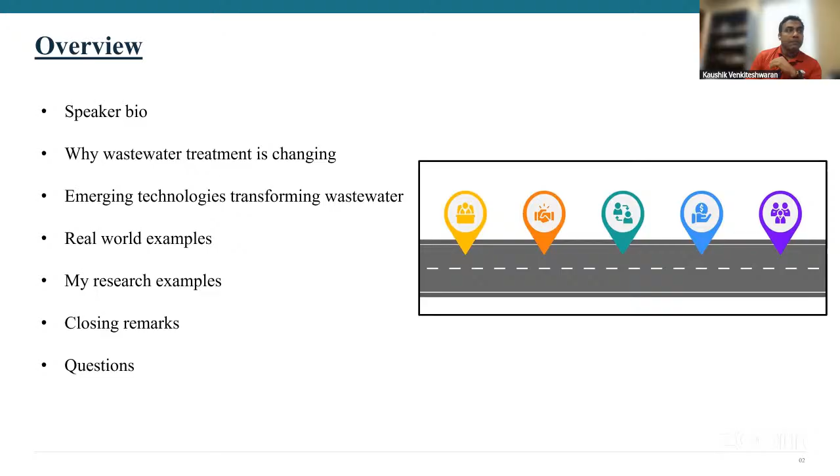So a little bit about me. As mentioned, I did my PhD at Marquette in civil and environmental engineering. I did my master's at Clarkson in civil and environmental engineering. But one of the points I try to bring up now, and also to my students, is that my undergraduate was not in civil and environmental engineering. It was in biochemistry. So that's one of the interesting things about the field nowadays, how interdisciplinary it is.

We require talent from different fields. And that was one of my first examples when I saw how environmental engineering is. Environmental engineering on its own is a true interdisciplinary field. We cannot do anything without other engineers.

There was a time when our job was just to move water. You had clean water here, you need to bring it here. That was our job. We were called water resource engineers at that time. But then eventually the water over here is not clean, so someone has to clean that water.

Now, how do you clean water? Practically, you use a filter or you use a chemical. Well, who makes that filter? Well, that's a material engineer. Who makes the chemicals, or how it's used? It's a chemical engineer or the chemists. Sometimes we use microbiology, microbes to clean water.

We need those. So I started noticing that my field will not exist without all this interdisciplinary field. And that's what I fell in love with, knowing that I have to learn more than what I know all the time for the challenges.

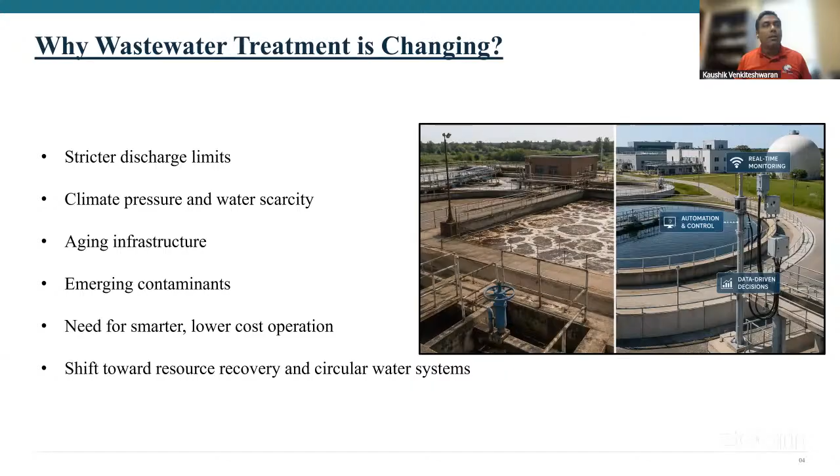All right, so with those drivers, there are certain emerging technologies in the landscape. There are maybe 10 to 12 that I came across, but I've kept the main ones that I experience when I go to conferences, etc. One of the main ones getting popular in the wastewater side, happening for a while but now slowly getting into application, is AI and smart automation. I'll go over a lot of these in more detail as we go along.

So you have AI and smart automation, which is basically what it sounds like — automating all the processes. Digital twin, which is basically a virtual modeling system that helps people visualize and predict how the systems have to be modified, etc. Advanced membrane systems — I know there are engineers in the audience.

I'm just not sure how many are environmental. So I'll go over a few details about the membrane systems. If you know already, I apologize. But membrane systems are now getting very, very popular. There was a time, it's been there for 2 decades, but it was very expensive.

RO systems are now in most houses in the US. It's slowly getting to a point that it can be affordable. Now, that same principle applies with wastewater treatment, etc., even water treatment. Now, those membranes are reasonably cheaper.

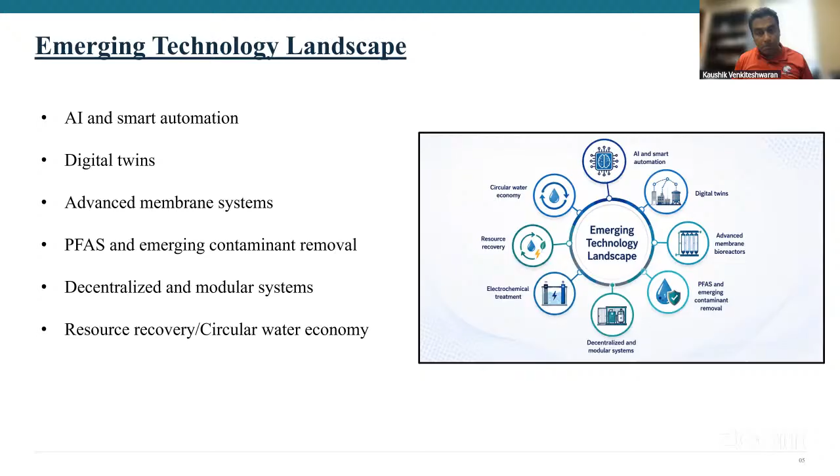As I said, we'll go over PFAS and emerging contaminants, decentralized systems. So that's a very important topic. It's also one of my research topics. We'll go over that. And finally, resource recovery, the push for resource recovery. So I'll go over some of this emerging technology landscape, and hopefully after this talk, we can have more discussion about these.

All right, AI and smart automation. So if you've ever been to a wastewater treatment plant or any kind of that system, it does not look any different from a refinery. You'll see a lot of pipes, tanks, etc., things moving. And the scale is huge. Even in Mobile, Alabama, which has a population, at least on paper, of less than 500,000 people, it has, I think, a capacity of 40 million, 50 million gallons per day. So that's a lot of water that has to be moved, maintained, etc.

And so if you go to a reasonable treatment plant, you'll see a lot of sensors. You'll see gauges, sensors, meters, pumps, valves, which are all operated automatically. Now, there was a time when there was manual operation, but the scale is so large, you only have 5, 6 people, it's almost impossible. So now you have what's known as a digital control. So everyone sits in an office, they have a big screen where they can push and control everything digitally.

Now, but that still requires a human to be there, right? So the human has to read the data from the sensors and then has to plug in and do some actions. Now, when you scale this even more and more, this is where AI and automation is needed. If you do a simple search on Science Direct for AI and wastewater, AI and anaerobic, you'll see thousands of papers of people right now modeling previous data. So they are taking data that has been collected from wastewater treatment plants and plugging it into new AI models. Why?

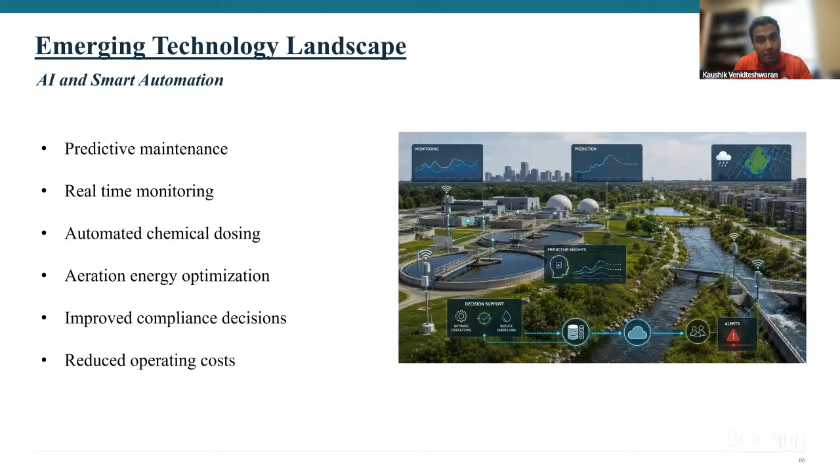Digital twin is, again, not obviously AI; people try to combine it with AI, but generally it's just a visual simulation technology, right? So you can actually basically create an entire digital wastewater treatment plant and then play with it. So this system is slowly coming in wastewater systems. I've again seen some companies, the same ones, Xylem, Jacobs, etc., who are doing it, but I've not seen it implemented fully. We are seeing AI and digitization, but we are not seeing the full virtual systems. But on the research side, I see a lot.

If you again do a ScienceDirect search, you'll see a lot of researchers, at least in universities, are trying to do that by partnering with local wastewater treatment plants. Because for them, it also is a research opportunity because you get so much data and you get predictions and models that you can use later on as well.

So this actually is the main thing right now that I'm noticing companies are pushing for and looking for talent in terms of integrating sensors, getting the data, and then modeling an entire treatment plant, which is complicated, but it's coming. There's a lot of progress in China on this. More studies are coming out of there for making wastewater treatment efficient, but that kind of talent is needed everywhere.

And I'm telling you, future wastewater treatment plants are going to be using this. No one wants to go back to 20 years ago and work slowly. They're all jumping straight to the new technology. So there's a lot of opportunity, a lot of ideas and interest in this.

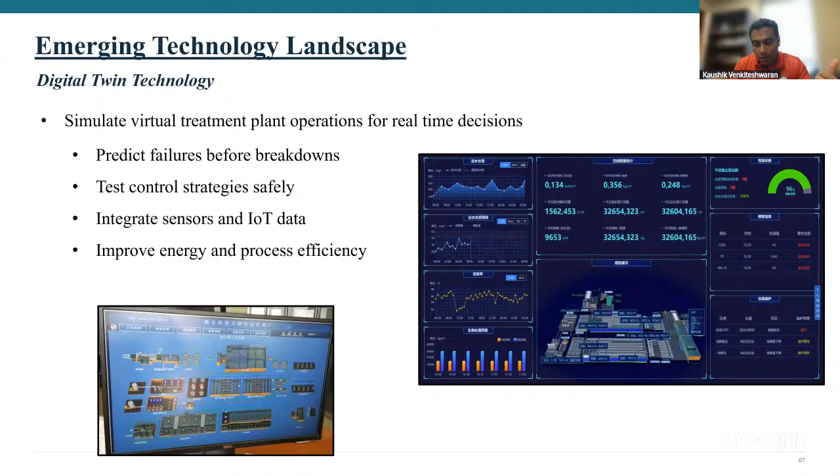All right. The third one is the advanced membrane systems. So membrane systems, what are those? So they're just basically, as they sound, a filter, right? We know that filtration can clean water. We know we have nano filters, we have micro filters, etc., that can clean water and remove small particles. And the smaller the membrane, the better it would be. That makes complete sense, right?

But there was a problem. The problem was cost. The material and manufacturing of this membrane was a big, big hurdle. And that has now completely changed. I'm not saying they are darn cheap now, but if you look at the price difference from 10 to 5 years ago, they're completely different. So now it has come to the point that wastewater treatment plants can afford these systems.

Again, think about it. An RO system in your house is just doing gallons per day. This thing is supposed to do millions, 40, 50, 60 million per day. So the cost can be a lot because the membranes get clogged and they have to be replaced. But the advantage they give is stupendous. For example, they can filter. So if you have tiny, tiny particles which won't settle, this is the only solution we have.

We are talking about nanoplastics and microplastics. So again, when we have to filter these, this is the technology we have. And we have known about this being very good for a long time. The only thing was the cost and energy. Energy is still a problem because you still have to apply some vacuum or a pressure to filter things.

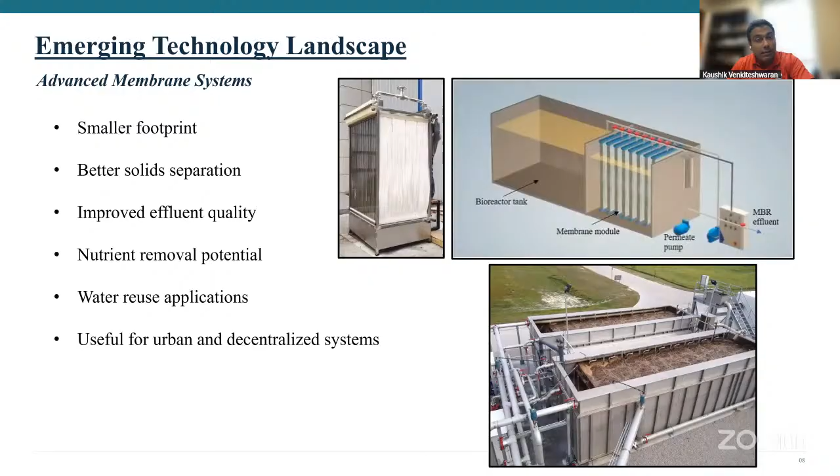By the way, just so you know, most of the membranes we have now are made of what? Plastics, polymers, right? And one of the pollutants we are worried about is plastics. So that's one of the challenges we have right now. It's not maybe in the digital world, but more in the material world, where we are looking for new materials which are not plastic based that can do the same kind of filtration that we need and survive the rigors of wastewater. And yeah, that's a challenge that we need to get over.

PFAS and emerging contaminants. I'm sure you all know about PFAS, the perfluoroalkyl substances, basically Teflon. It's a major issue all across the world. There is a lot of talk about reducing its use, but unfortunately, the properties of those materials are still so good that we use them.

So for that, a lot of the technologies that I'm seeing are advanced oxidation. It's basically creating peroxide in the water, and the peroxide is a highly potent oxidant, and it breaks the PFAS molecule into elements of carbon and fluorine, right? I think you can understand how expensive this would be, right? And that's the main thing.

Again, it's the expense. So whenever I bring in all these technologies, it's not to replace the technology or replace the people or the operators. It's to make it efficient. That's where AI and digital and smart technology is focused. It's not necessarily a solution, it's improving or optimizing the system. And that is also very essential.

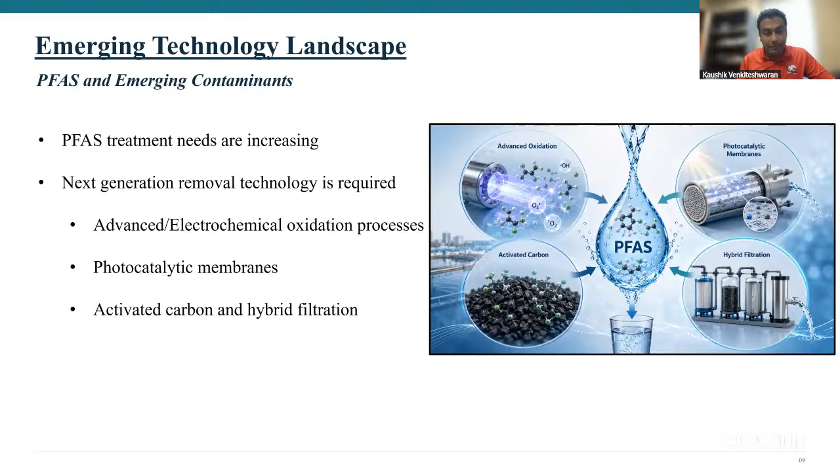In the US, I don't know about the numbers in Nigeria or anywhere else, it roughly costs around $1 million to put in 1 mile of pipe, or close to it. Now think about the cost. If you have to connect two houses which are 1 mile apart, who's paying that $1 million? Is it the taxpayer? Is it those two houses? Is it everyone? So that's the situation.

The US is a huge country. There are a lot of locations, and I'll go over some in the Alabama Black Belt, which are still rural. Houses are far apart. There is no infrastructure. What do we do? If you want to do a central system, you cannot. It's going to cost. Who's going to pay? So this is where the thought has come in to go into a decentralized pathway, where you have these smaller modular systems.

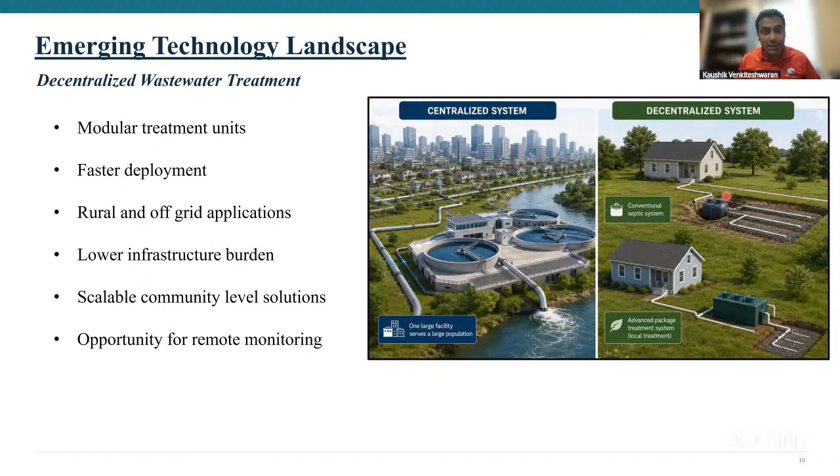So these technologies will only be successful if it's automated completely, because as of now it requires maintenance. People have to come every 6 months and stuff like that, which is a hassle. So every technology, to make it even more efficient, even more user friendly, we need to make it more digital, just like a smartphone, right? Older phones did the job, but obviously a smarter phone is better for us. It's more user friendly. That's kind of what we have to do in these technologies.

So while doing our treatment, we also have to look at how we can reduce the amount of inputs we are putting in and the waste we are creating, which may be even more hazardous because you're pulling all the nasty out of the wastewater. Now, this is even worse than the wastewater. So we have to find a way to reduce waste because we are running out of landfills.

Lower energy and chemical demand, that's going to be a factor. Cost of fuel, if you haven't noticed, has gone up. So yeah, that's always the talk. It's always about money. It's always about taxpayers' money, and the money goes in two things: chemicals and energy. So that's the main way to reduce it. And as I said, if you have an automation system that can predict you don't need something over here and over here, you can save just by that. We are not trying to reinvent the wheel, come out with a new chemical. No, just the same principle, just better and efficient.

And overall, the last point is something I tell my students all the time. I see wastewater as a source of value rather than a waste. You can make energy out of wastewater using anaerobic digestion, which I've worked on. You can use direct water reuse; if you have the time, the energy and the money, you can do RO or something, and you can basically drink the wastewater. This is what the astronauts do all the time. They're drinking their own sweat and pee. No one's complaining.

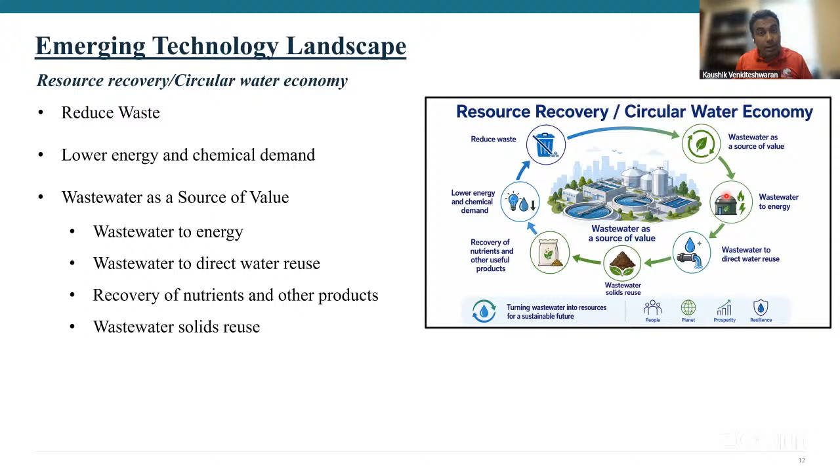So new challenges. Obviously, we have to use wastewater as some product because again, we don't have landfills. But at the same time, we need to come up with some new solutions in how to prevent contamination when we are trying to do something good. All right, so we'll move on to some real world examples. There are so many. I just found a few.

So smart sewers. So I only talked about wastewater, but sewer systems and stormwater sewer systems come under that. So South Bend is a city in Indiana. They put up 120 smart sensors and actuators to open and close gates. What was the benefit? Oh, I don't have the number here. I think it's 70%. So overall 70% reduction in combined sewer overflow.

What does that mean? Just if you didn't know, so combined sewer. Typically, you have a sewer pipe and you have a stormwater pipe. The stormwater pipe is just supposed to carry rainwater, and the sewer pipe is just supposed to carry sewer. But that requires two pipes, and that's more costly. So a lot of cities in the past, even now, what they did was combined sewer. So what happens is it takes the sewer, and whenever there is rain, the rainwater also gets in it.

Now, I will ask you, if I put one drop of sewer in a cup of water, is that cup of water clean? No. So even if there is a very little amount of sewer water in the pipe, if you have 2 inches of rain, now you have a million gallons of sewer water. So that's what causes the overflow. You have this much sewer, the treatment plants cannot take it. It overflows, gets into places you don't want it to get to.

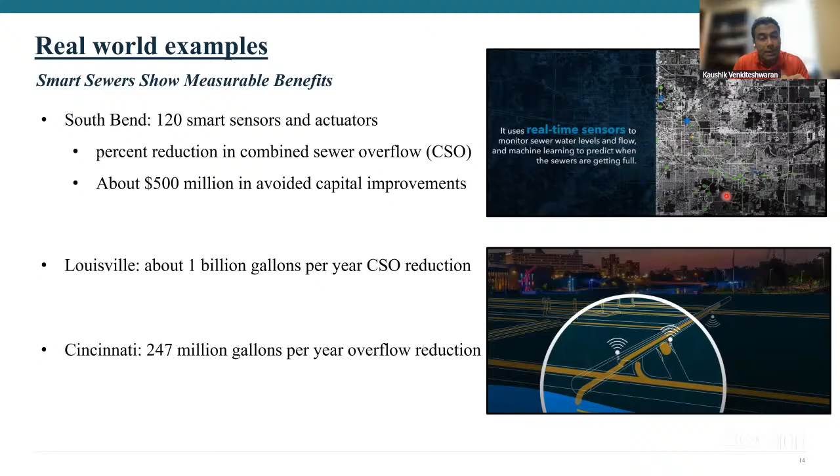Another real world example regarding wastewater monitoring and public health this time. I wanted to bring this in because this was something very interesting that I was also very interested in terms of my research. So, of course, during COVID, we know that there was a lot of wastewater monitoring that helped a lot. It makes sense. Humans, when we release waste, a lot of the microbes in our body are also in that waste, and that can help detect things. And that was used very effectively during COVID.

And now, if you didn't know, we are still using it in the US, and at least a lot of countries still have funds to do this kind of monitoring because it is very, very beneficial to tell if there are any emerging diseases coming in a region or in a community. Now, again, how was it done? Well, the classic way. Someone has to go there, collect a sample, come to the lab, do it properly with standard methods, etc.

Basically, if you've worked with microbiology, you use a plate, put some microbes in there, they grow. Or if you want to detect, you put some kind of an indicator that binds to those microbes and has a color or some kind of fluorescence. We used to do it in the lab manually, but now you have a system that can do it automatically.

It has a system with pumps, it will draw the water, filter it, add the enzyme, heat it up, incubate it—things we used to do in the lab—and then take a sensor picture and send that picture out. So all that's automation.

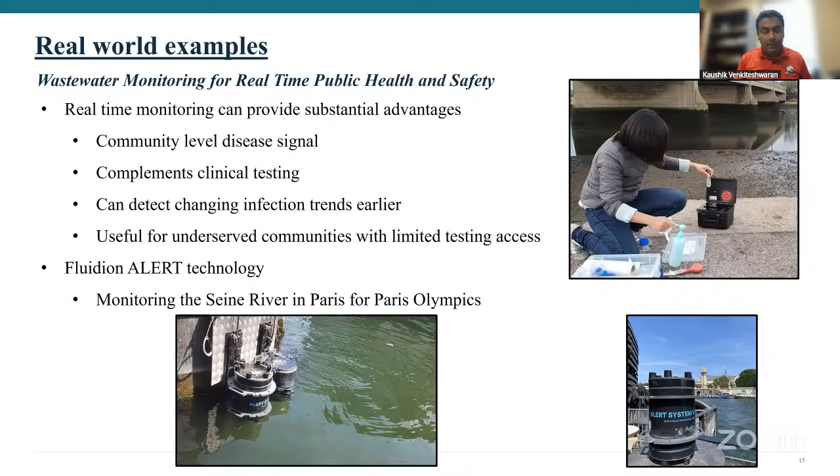So, five minutes more, I guess. Now I'll come up with my research examples, some of the topics I'm doing and how I'm trying to incorporate AI and technologies and need them in my future work.

One of my works that is going on is funded by NOAA, National Oceanic and Atmospheric Administration, and the Sea Grant, and it's on microplastic research. It has multiple goals, five total objectives, including monitoring, survey, removal, and education, outreach, etc.

So that was our push. We wanted to get more data on microplastic in our coastal environment and see what factors influence them. Within this grant, we were able to start a center called GC CAMP, Gulf Coast Center for Addressing Microplastics Pollution. It includes a lot of members—engineers, chemists, microbiologists, etc.

So this is one—I also have a link up there. This is one avenue where collaboration is welcome. We are looking for skills and talent that can help in this fight against microplastic, which I'll explain a bit.

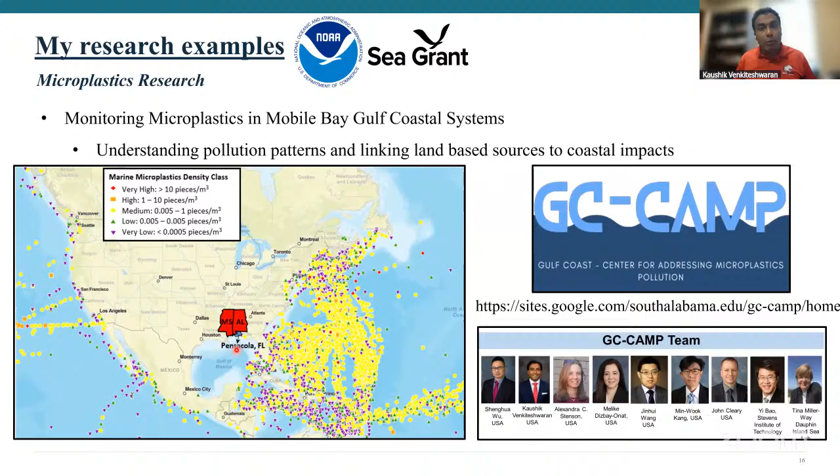So the first objective was understanding the pollution patterns in the Gulf Coast—what are the main sources of microplastic getting into the Gulf Coast. Our hypothesis was very simple: wastewater treatment plants are the primary barriers between waste and the environment, so that's where our main source is for the environment.

It's not that the wastewater treatment plant is the source, but at least from the reference point of the location, that's where it's coming from. So we monitored five wastewater treatment plants all across Mobile. They had different treatment systems that helped us relate membrane versus lagoon versus aeration systems, etc. We were able to correlate different things. At the same time, we monitored 10 environmental water locations—surface water near the wastewater treatment plants and around the area.

Another point to make—a lot of studies doing microplastic research find it a very daunting, hard task. They don't necessarily give you all the data because it's a lot. But in our case, we were comprehensive.

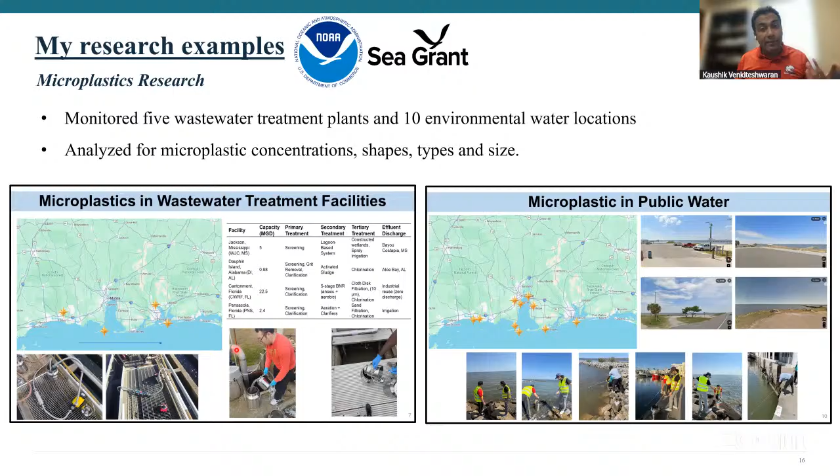We looked at the concentration, the shape, the type, and the size. We used FTIR to get even more information than most papers bring in. I'm just going to go over the results in general. We can have more Q&A later on.

Overall summary of wastewater treatment plants: we found the most common plastics were PET and polystyrene, which are also commonly used plastics. In terms of shapes, we found all types: fragments, film, beads, fiber, line particles, etc.

Overall, what we found is that the wastewater treatment plants did reduce the amount of microplastics, but it was not consistent. Sometimes we actually saw an increase. Why? Because treatment plants have a lot of pumps, motors, etc., so if a big cloth comes in, it can break down and become multiple microplastics. We need to consider this in a different way.

Overall, yes, there is a reduction, but it's not that it's not generating its own. So it looks like it generates its own, and still there is a relative reduction. But we need to also consider that it generates its own.

In public waters, again we found similar plastics: PET and polyethylene, the most common plastics used in cloth, fiber, utensils, etc. In terms of shape, again we found all the shapes, with fragments being the most common.

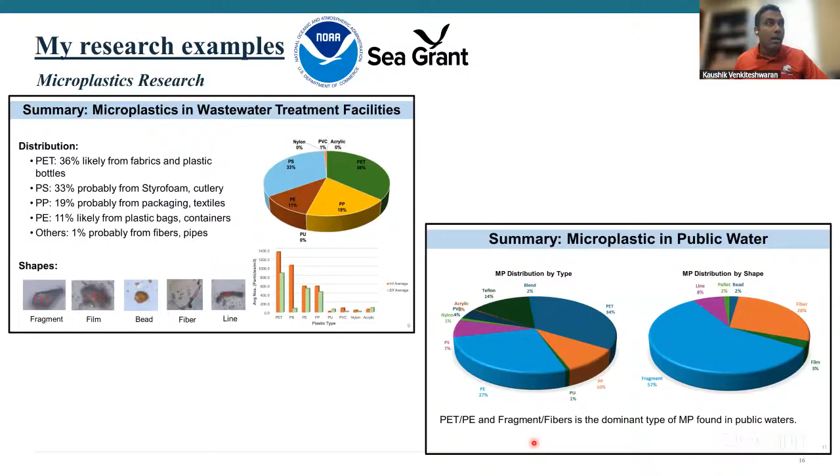So what does it show? Well, the plastics which are common are commonly found in the environment, and we started to build our datasets over here. The second part of this research is looking at removal.

Now we are monitoring it. Now, how about removal? Microplastic pollution is everywhere, it's vast. If there is a filter that we need to come up with, it has to be cheap. So what we went with was to look at carbon-based filters first, because carbon is already in the market, already used, and we wanted to see what it can do with microplastics.

So we investigated a bunch of filters. We looked at sand, which is the classic, activated carbon, which is again classic. And we also looked at a newer form of activated carbon in the field of wastewater called activated carbon fibers.

This activated carbon fiber system is still used in air filtration primarily, not in water, but we wanted to see it because it has higher surface area and higher porosity than activated carbon. Everyone talks about surface area when it comes to removal.

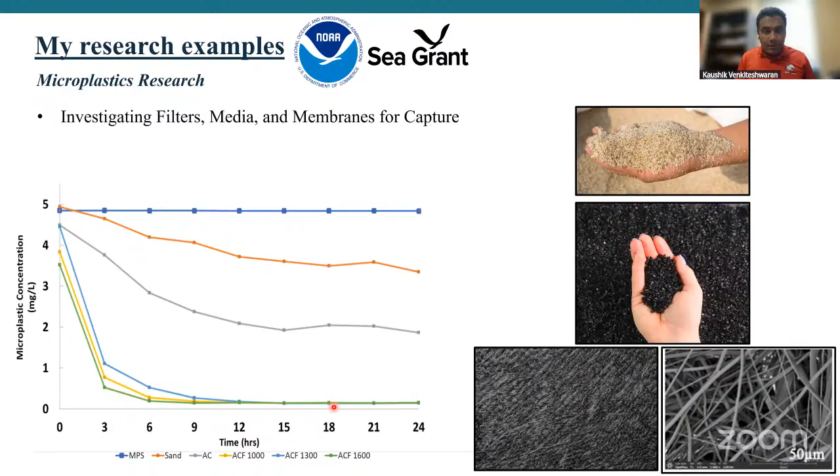But the main challenge we had, and this is where the topic comes in, is automation in detection. The students who collect water have to dry it or sieve it, then separate all the sand from the plastic using density separation. They have to do it multiple times, then wash it, put it in a filter, then take a picture. And after you take a picture, you still have to count manually. It's a lot of work.

It's a lot of work. That's why you don't have a lot of studies doing this kind of work. It takes a lot of time. And this is where one of the main hurdles in this research comes in.

We need AI assisted image analysis. It's absolutely essential: faster particle counting, classification, everything, all of this we need. I've noticed a lot of labs are doing it, they are able to identify images, but all of that has to come into a package. I have an FTIR machine which we can do manually, we can see, and my student is counting manually.

But the softwares we have for counting aren't that accurate. So we need something that can count, differentiate plastic from sand, and also tell us shapes and sizes. We have a couple of people in our current GCCAM team working on it. One team is looking at taking microscopic images and trying to identify particles, and the other team is looking into detecting them in the environment. The second team is further behind since we need to first have that microscope sensor before moving into environmental sensors.

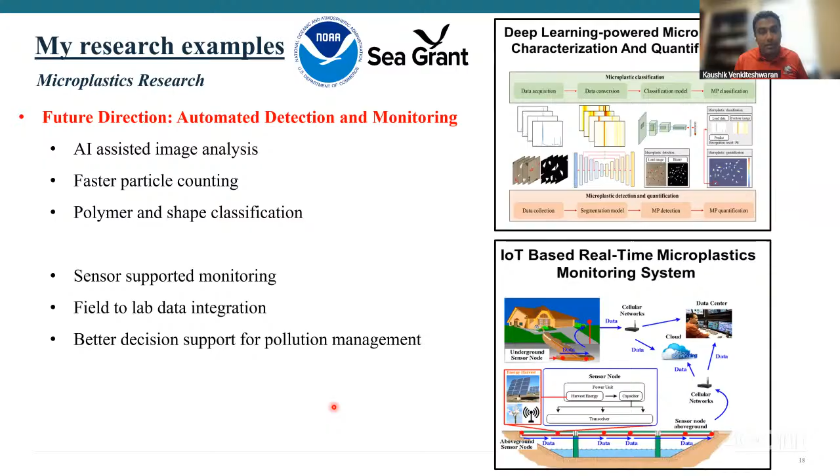I'm talking about during the slavery times, etc. But after emancipation, a lot of the people who were working there stayed and were given land. One reason that region was so good for cotton was because cotton needs standing water, and the area has clay soil, which naturally holds water—great for that kind of farming.

However, clay soil is not good for wastewater. If you know what a septic tank is—it's basically a rectangular tank with a chamber and a wall in between, and its job is to hold the solids. The wastewater comes in, the solids fall into the tank, and the liquid goes out, usually into the backyard where it trickles into the ground. This is known as the leach bed.

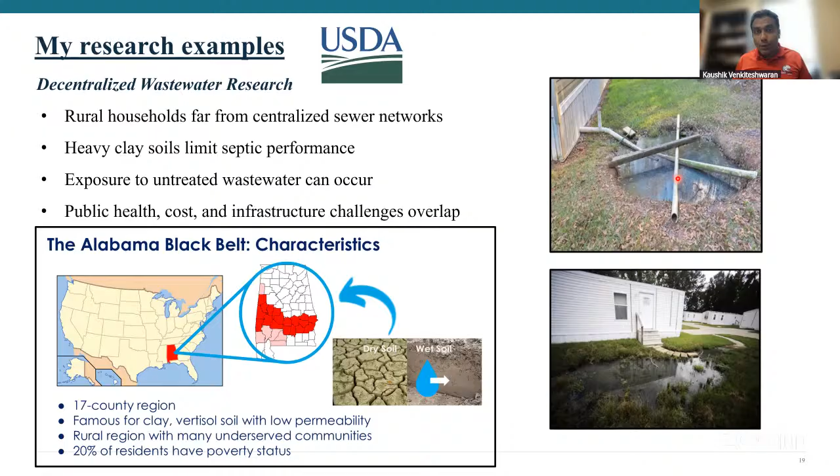So what are decentralized solutions? Basically bringing wastewater treatment smaller, behind a backyard. There are certain technologies out there—one is an aerobic system with microbes in it, called the Fuji Clean system, which was deployed in the Black Belt and tested. The other is the Advantex, a filtration membrane system where the water is filtered and microbes grow on the membrane to treat it. Both are biological systems, small and compact enough that they can be placed behind the house.

It has microbes in it. It has to be aerated again. All that. So again, automation is the only way these kinds of technologies will get to the people. It's fine to have it in literature, etc. Having a company say we have it, oh, pay us maintenance, we'll come every year. No person wants to do that.

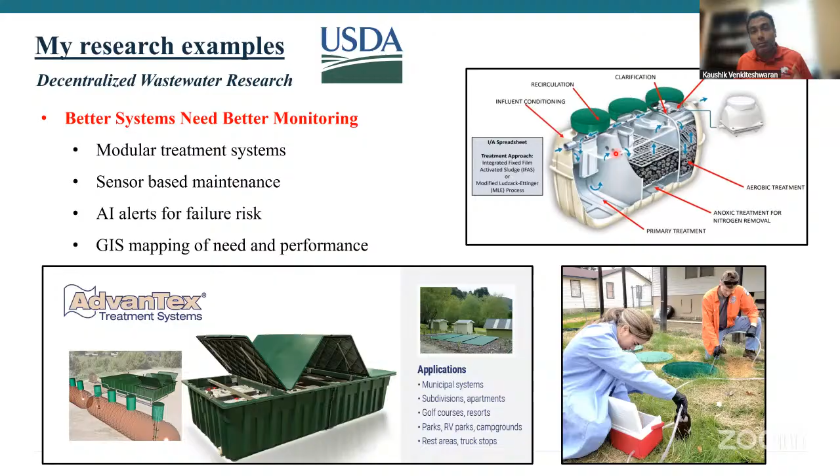So they want something that they have control on and they can monitor, just like your air conditioning or whatever you can have in your house. So this is where again technologies are there, but they're not smart enough to be employed, and that's what's keeping it away from application. And making it smart and affordable would progress more.

My final research example is on stormwater research. This is primarily funded by EPA. There are two grants right now that I'm working on. Both are looking at removing nutrients from stormwater. In the first grant, I proposed to develop geotextiles. Geotextiles are basically plastic fabrics used in construction. But my idea was to develop a hybrid geotextile that can be used for construction and reinforcement purposes, but also has some functional groups that can help grab nutrients.

So I'm working with Auburn University. They have a stormwater research facility where we can test these fabrics in pilot scale systems. So that was the first work. And the second work is a development of the first work. In that, I used plastic geotextiles. Now I'm working with NOAA on microplastics. So the last thing I want to do is use plastic, especially in farms. So I propose to use agricultural residues, their waste products, sticks and stems and hay, and develop a fabric or a filter out of it.

Now, both these have nothing to do with AI or digitization directly. But again, one of the main challenges that I saw the farmers face and I will face is sensors. There are a lot of field sensors out there, but they are all individual. They can maybe communicate a little bit to each other, but they are just a data dump. There is absolutely no algorithm there. So a farmer can put a sensor, but all he will get are five numbers, and he doesn't know what to do with those numbers.

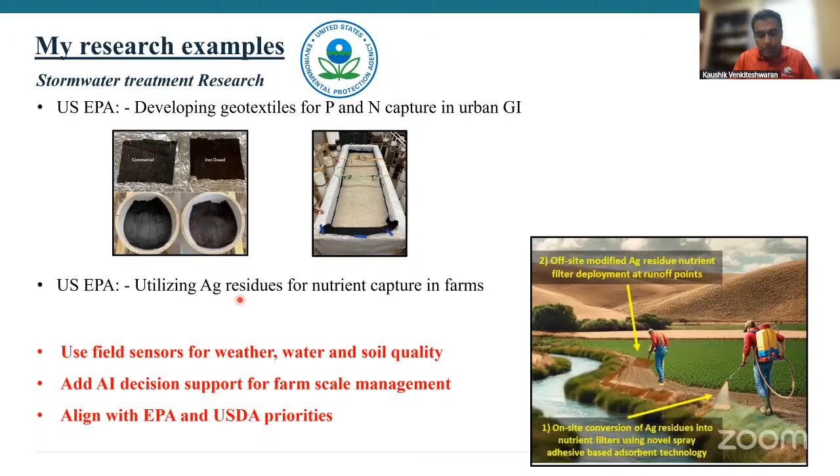And I'm telling you, this is the perfect alignment with EPA and USDA and all other grants in the US right now. Every agency has a big section which says AI or something. Like you need to have some kind of an AI element or digitization element in your proposal. And that's basically what I've been doing. Any proposal I have, I'm including AI and modeling and LCA or something like that to improve the overall product at the end. So, closing remarks.

So overall, technology that creates impact is the main technology that helps. I mean, there are a lot of technologies out there which are maybe 10, 20 years away, but come on. If it's not useful, it's not useful. You can have a phone for $10,000. Well, good luck, that's your phone, right? The only reason smartphones are useful and everyone's using them is they're reasonably affordable. So that's the first thing.

I've noticed that digitization and automation in my field make things affordable. An operator doesn't have to walk 15 miles every day. Everything is in his office. Everything can be controlled. He doesn't have to worry about being sick or something like that. The treatment plant won't collapse and release some pollutant. Everything can be done in a cost efficient way. That's the main thing. Second, locally maintainable.

Of course, if it's simple, you don't have to get an expert from somewhere and train them. You can train the people locally and they will own it. They would feel that this is theirs, and if something happens, their community gets hurt. Community centered, both go together. If you bring in people from the community in the planning, then they will have a stake in it. They'll put money in it.

Data driven, environmentally protective, built for long-term use, and connected to policy. All of these are connected. I know there are a lot of elements in there, but eventually it's all about information. If people get information right in their hand as soon as possible, they feel happy, they feel more trustworthy. So, technology is the way. We have seen this in politics, we have seen this in a lot of things. We should see this in the infrastructure side of things as well, where a lot of money goes. Think about it, how much money is being applied in infrastructure.